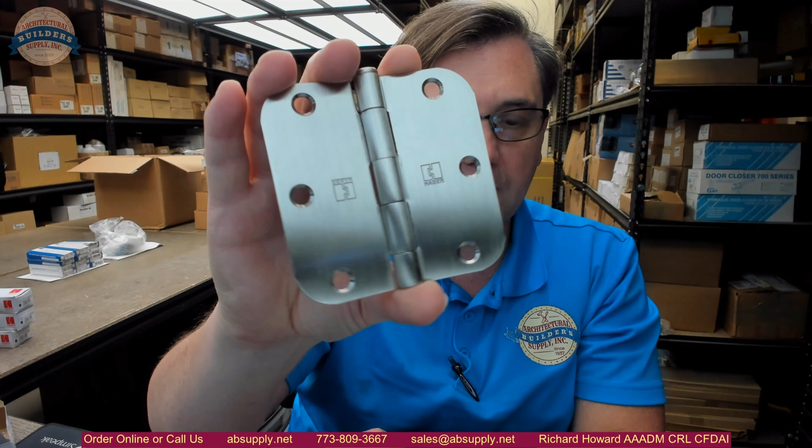This is their part number RC1542. This is a 3.5 inch by 3.5 inch US15 hinge. I would say this is a less common hinge, even though it's incredibly common in all other aspects. The less common aspect is that this is made of solid brass, with a brass pin.

So where someone would want to use this particular hinge is when they want a finish like US15, but they should call this 619. 619 would be the BHMA part number for satin nickel over solid brass. This would qualify to be called that.

When someone wants this hinge, it's because the finish ought to be superior when it's on an architectural base material compared to a steel base. Or they're in an application where they want brass hinges. A 3.5 hinge like this, who knows what they're doing with it, made of brass. If it's for the non-ferrous properties of the base material, they could be doing some application in a coastal or exterior environment, and they don't want the hinge to rust.

This hinge can also be done in stainless steel. That would be a good option as well. Could be because of the finish — you'll get a really nice finish out of a piece of solid brass with a satin nickel finish on it.

So the RC1542 conspires to mean a number of things, in no particular order. As we demonstrated earlier, it's made of brass. It is a full mortise hinge.

You can see from the swage on the hinge leaf here and here that the leaves are meant to be mortised flush to the edge of the door and frame when installed. It's a 5-knuckle hinge. It is a plain bearing hinge — there are no bearing packets at all. It is an RC, meaning 5/8 radius on this hinge. A 5/8 radius is, of course, a 1.25 inch diameter.

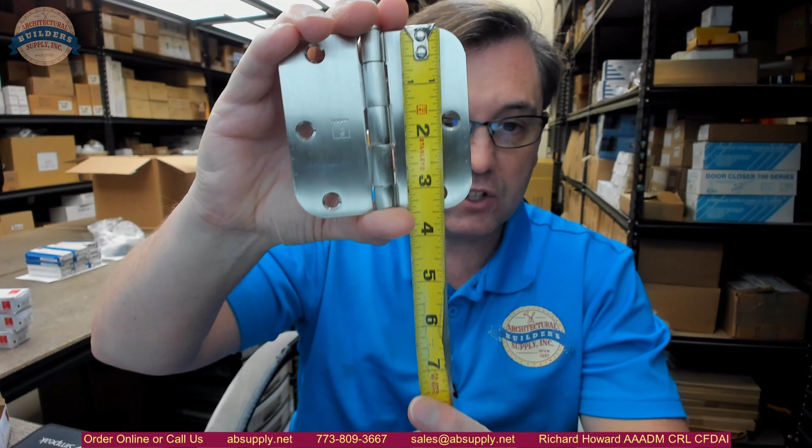Let's talk now about the size of the hinge. The size is 3.5 inch tall and 3.5 inch wide. It's important to know that the height is the first dimension. Probably not so important at this stage if you're dealing with a square hinge, but it would be important to know if you're dealing with 4.5 by 4 or 4 by 6. You want to know which is that first dimension, and that is the height.

The thickness of the leaf ought to be probably about 96 thousandths. We'll discover that, but my caliper, since I'm taking dimensions, tells me 0.088, so it's 88 thousandths of an inch thick.

Now let's move onto a screen view of this product and take a look at the supporting documents that we have down below. So this is the item that we are looking at here.

Extended description information must be purchased in quantities of 2. I don't have a problem ordering odd numbers, and I can bring the hinges into us first and put the remaining on the shelf. But Hager likes to ship them as boxes of 2. However, the unit price is per hinge, so that's, of course, very confusing, no doubt.

US15, removable pin. We demonstrated earlier we could drive that out if we wanted to. That's our size. Full mortise, brass hinge, brass pin. 085 is what they're calling out. I believe we measured 088. 6 hole count, and we'll get to the template in a moment.

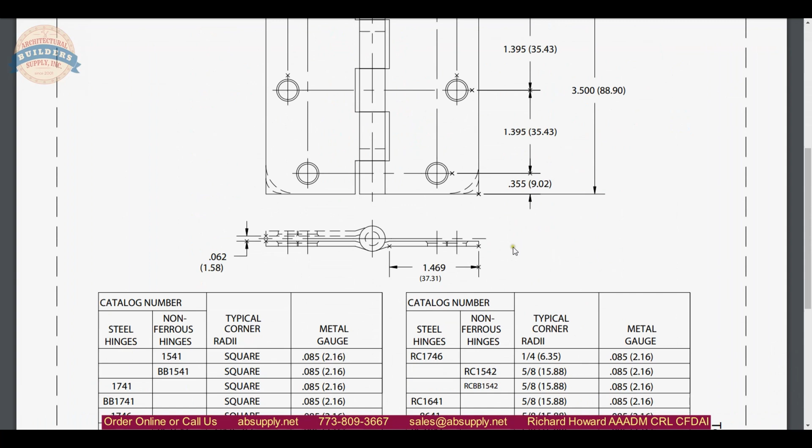Now, the supporting documentation. Template. Let's look at the template. This is a technical drawing of this hinge, and all of the other Hager part numbers that have the same dimensional properties. What will change, of course, will be the 5/8, 1/4 inch, or square corner on all these different part numbers. So it's a template that will apply to many different hinges.

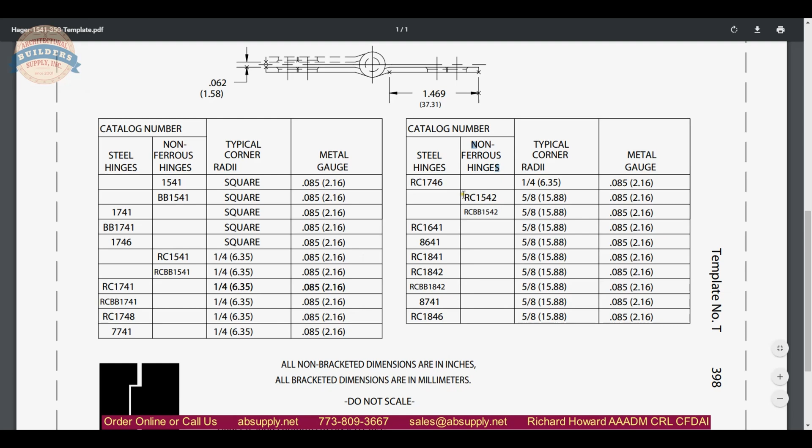Obviously, our RC1542 would be in the non-ferrous column right here. It is handy because it will show you the location of the screws, should that be of interest. It will show you the gap between the 2 leaves when they're brought parallel based on the swage line that's here and here. We'll also show you the length of the leaf from the start of the swage line to the edge of the leaf. Some people like to know that. I know it's 3.5, but what is only the leaf portion? Some people like to know that.

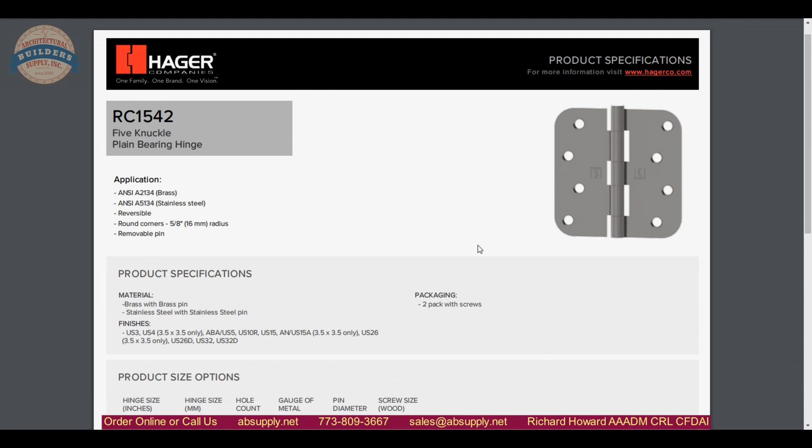Looking at the data sheet, that's just a cut sheet from the manufacturer. Nothing new there at all. It could be something that you include with your packaging, with your submittal package, I should say. It does give us other finishes, however, that we can look at.

US3 for polished brass. US4 apparently in a 3.5, 3.5 only, in satin brass. ABA is also known as US5, which is antique brass. US10R is an antique bronze, relieved and lacquered. It's a little darker version of oil rubbed bronze, except there's no oil involved.

Oxidized relieved, I think they call that. It's a darker version, and I'll show you these finishes from Hager next. US15 Satin Nickel, Antique Nickel, 15A, 3.5, 3.5 only. Polished Chrome, again. Satin Chrome, Polished Stainless, and Satin Stainless.

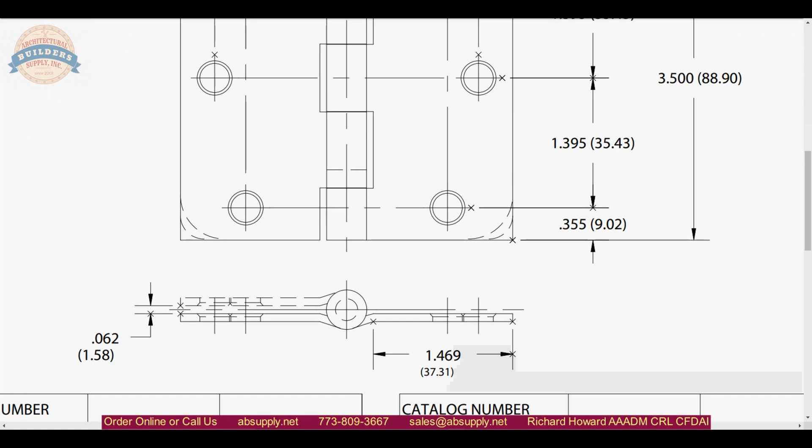Now, in our website, and very likely by the time you're seeing this video, this will all be in a different location, but we have a finish chart from Hager. And it's here. Yeah, there's a couple of them actually. Hager finish chart, Hager product finish guide, Hager residential hinge finish chart. Sprayed finish we don't care about.

So we were talking about 10R. I don't see that they have 10R listed on that first sheet. Antique bronze lacquered, that's 10R, page 7. Well, they call it 10A. I think the R is going to stand for relieved. Antique bronze lacquered and relieved, gives it a little different finish. They don't have that there either. There we go.

Antique bronze oiled. It's a darker version, like I said earlier. They will kind of use this in replacement of US10B sometimes. Antique bronze relieved. Antique bronze oiled.

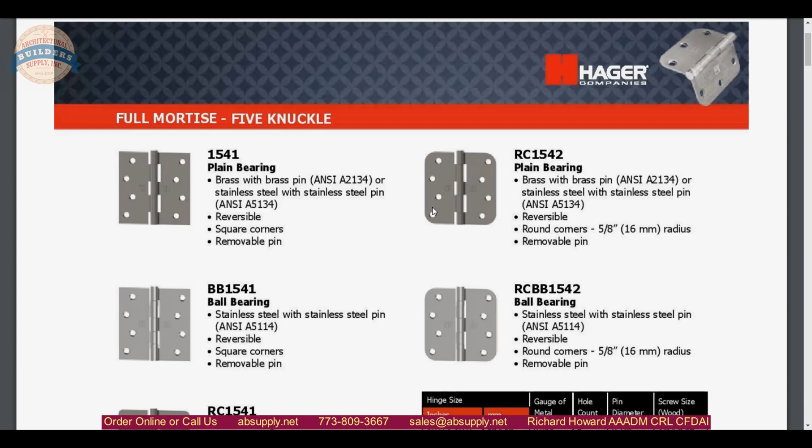Handy to be able to look at these other hinges. The issue, oh, and forgive me, the ball bearing version is here.

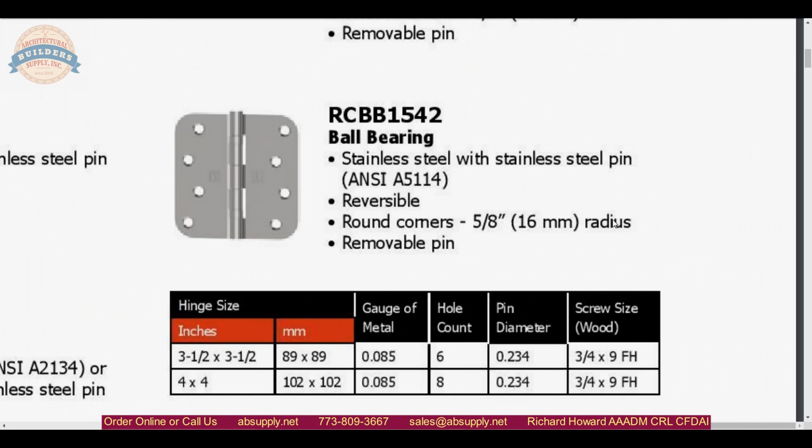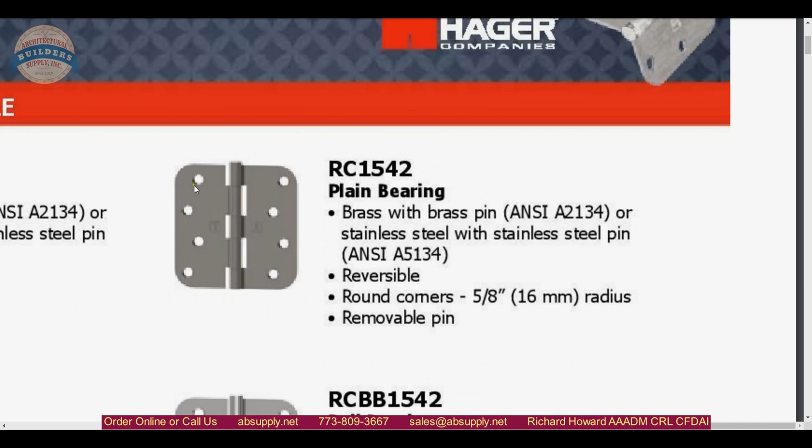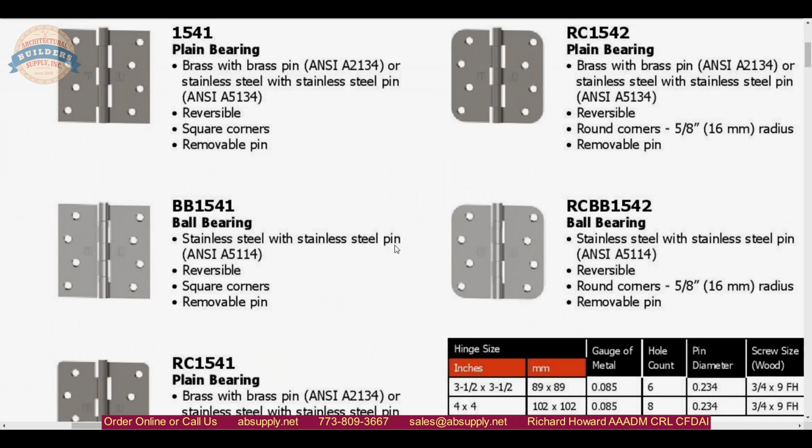If you're doing a door of any weight or of any use in terms of volume at all, absolutely go to ball bearing immediately. Don't even consider plain bearing. Even if you had a door that was only open 10 times a day at the most, in 20 years, you're definitely going to tell the difference between a plain bearing and a ball bearing hinge. That may not matter, but it will matter to someone, there's no doubt. I would simply spec the hinge correctly to begin with. I can only really make an argument for plain bearing in the instance of you having a door that might be opened twice a year, and it just doesn't matter.

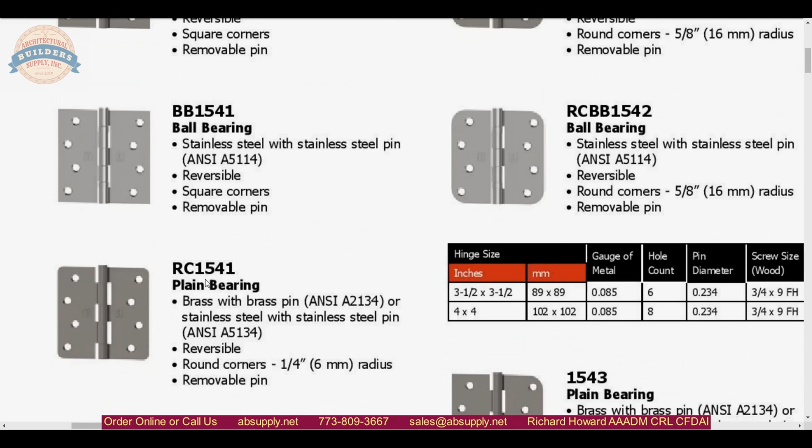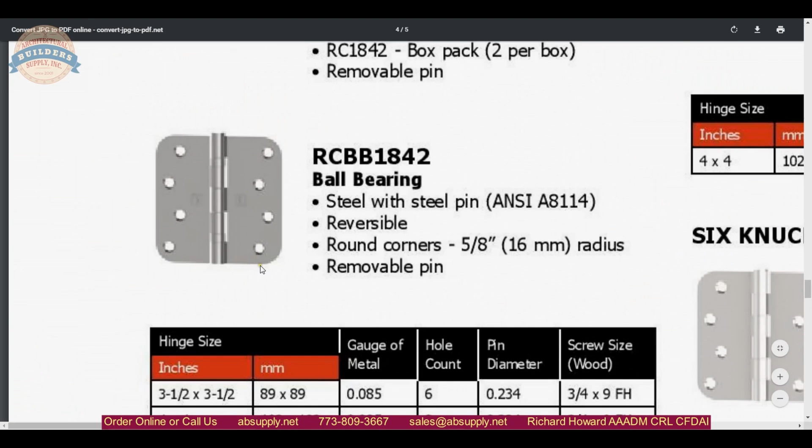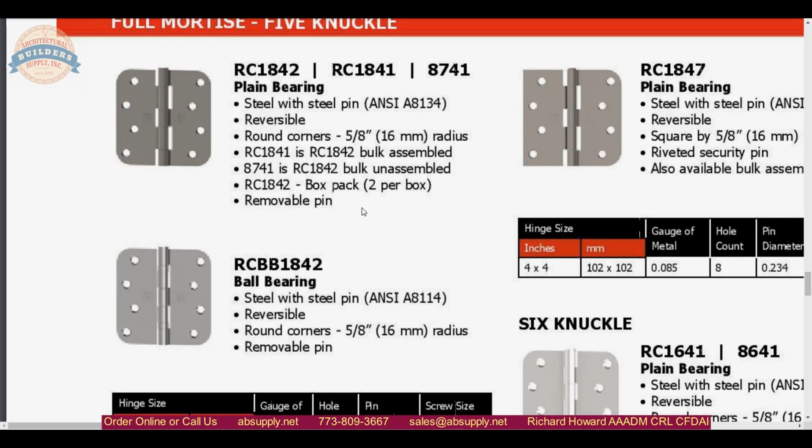Other hinge options are here. What you want to do with Hager, because they have so many options of residential hinges as we continue to scroll through - we're into page 4, and there's many options per page - is you'll need to make sure that the pattern of holes, the pattern of screw locations, are going to match what you're doing. This zigzag pattern is not uniform from every manufacturer. Hager, I believe, has some stuff that's uniquely Hager, and even though other people have stuff that's incredibly close, uniquely Hager is an accurate thing to say.

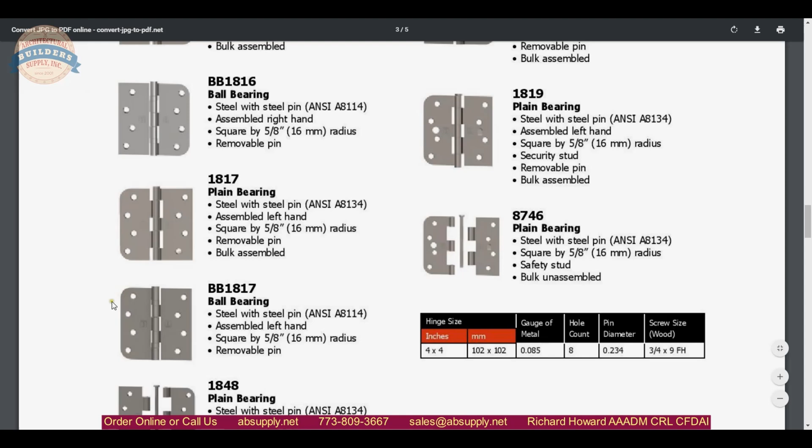You've got the square corner by radiused corner. That's when you have a steel-edged metal-clad door with a wood frame. You could see that very commonly, etc.

Now back to the manufacturer's, back to the item that we're working on. This is the link to the manufacturer's page here in the website, and that's an important document, or link. It will allow you to see not only all of the Hager products that we sell, but a link to the manufacturer's full-line catalog, their website, and other important documents that are here. If you are into locksmithing at all, and you are interested to know more about the Hager keying system, that manual would be very helpful, along with this companion video that I made about the Hager keyways and their keying system.

Let's finish up this video on camera.

So again, where you're going to use this hinge - somewhere where you want a nice looking hinge, 3.5 by 3.5, radius corners, made of brass - you are certainly going to pay extra for the brass base material of this, so choose accordingly. Probably where this is going is in maybe a gate structure in an exterior environment would be my guess. You want a nice looking piece of equipment that's not going to rust immediately.

The name Hager Hinge, Hager, is their namesake - a company that's been in business since about the mid 19th century. They are, however, a manufacturer of many more things other than just hinges: lock sets, exit devices, electrified hardware, door closers, weather stripping, trim and auxiliary accessory hardware, signage, and their continuous aluminum geared hinges under the name Roton, etc.